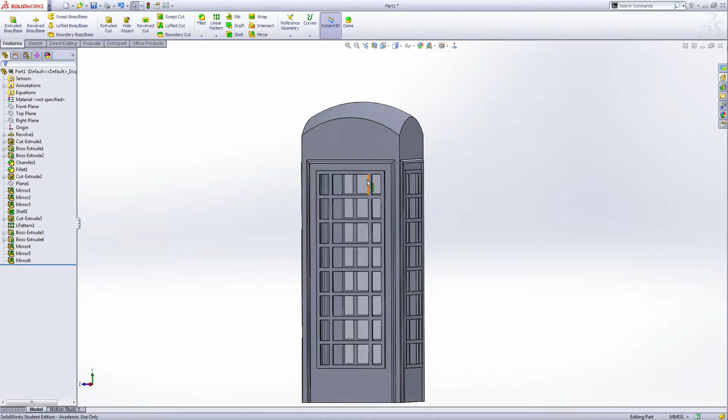Last time we stopped here, before we ended the telephone sign on top of this part, we make a chamfer on this window like this. Let's select the chamfer tool here: the depth is 0.5 millimeter and the angle is 45 degrees.

We select the face of this. Zoom in a little bit, then select the whole face. Select this face, okay, now all the edges are selected. Rotate a little bit, zoom in, and select this face.

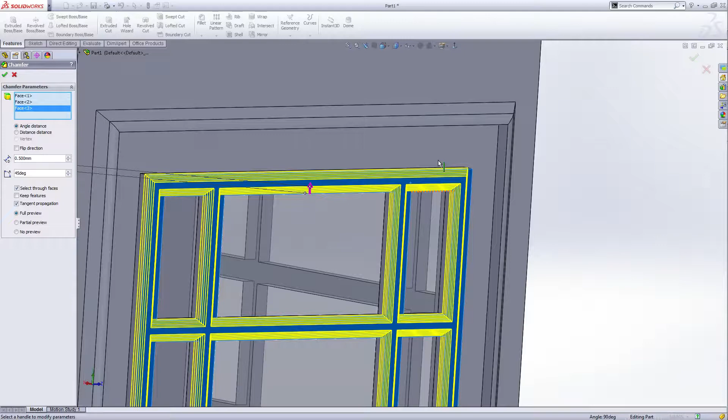Rotate to this way, select the whole face. Now the last one, rotate, select this face. Remember, make sure you select the face, not the edge, something like this. So we need to select the face. Now select all the faces, and all the section is done.

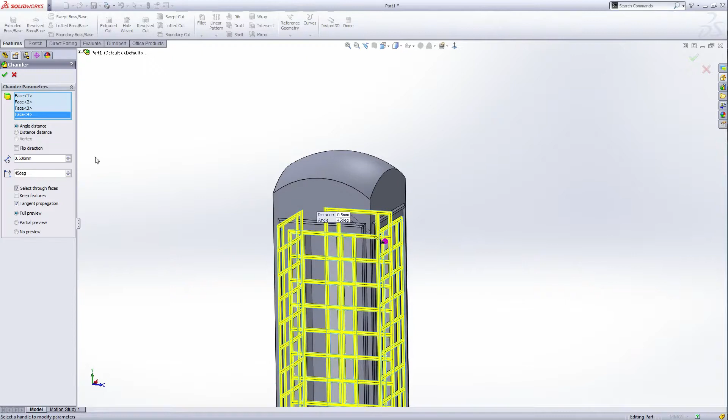Click the green check. Now we made some chamfer on these windows, you can see the difference, it now seems pretty. Okay, now we hold the control.

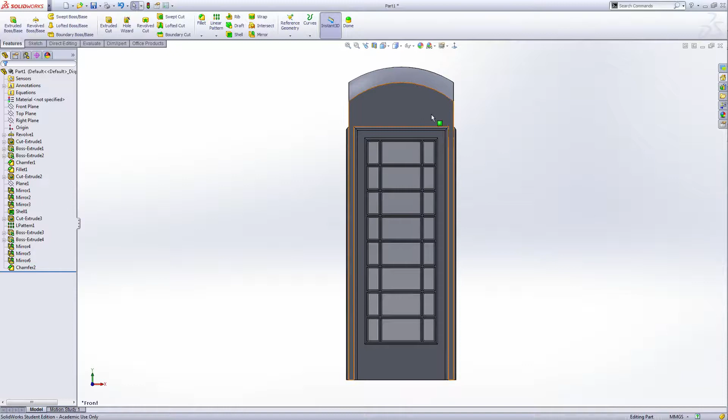This is the face, this is the front view. I want to use this view to do the first one. Select the top face, click the top face, and extrude boss. Now make the sign of the telephone sign frame.

Now select the center rectangle, draw a rectangle. Select dimension, hold the control, the center and the original point, make them vertical. Now give some smart dimension of this.

The height of this is 6 millimeter. Distance from the original point to the center is 4 millimeter, and the total length of this is 36.5 millimeter. Now exit the sketch.

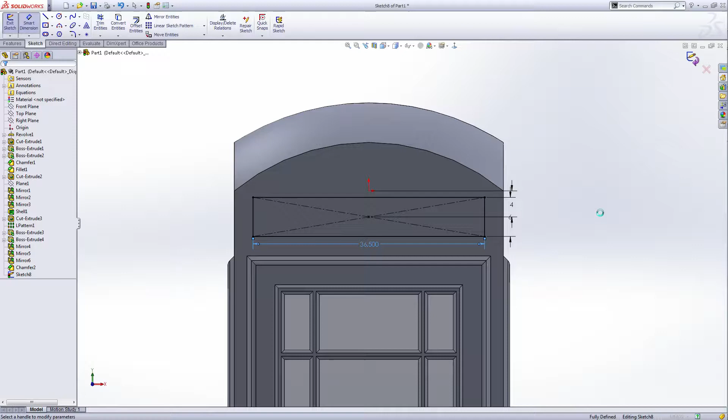Extrude outside, the arrow pointing this way, see, pointing this way. So the depth of this is 1 millimeter, and green check.

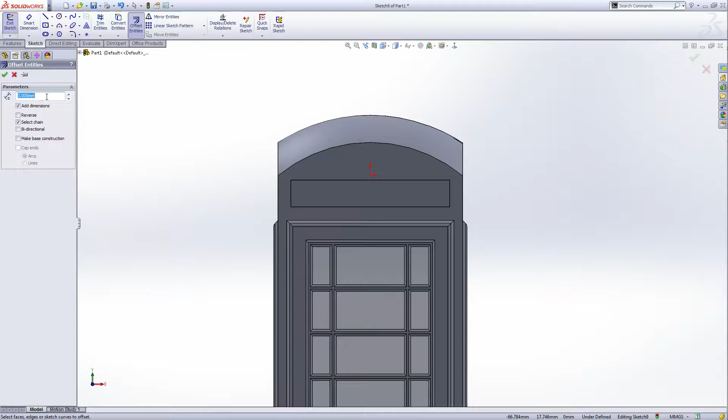Now we cut the hole for the telephone sign. Select the face we made and extrude cut. This time use the offset entity, and the depth of this is 0.5 millimeter.

And we select the outside edge of this. We want to reverse, point inside. Okay, now green check. Exit the sketch. We want to cut inside.

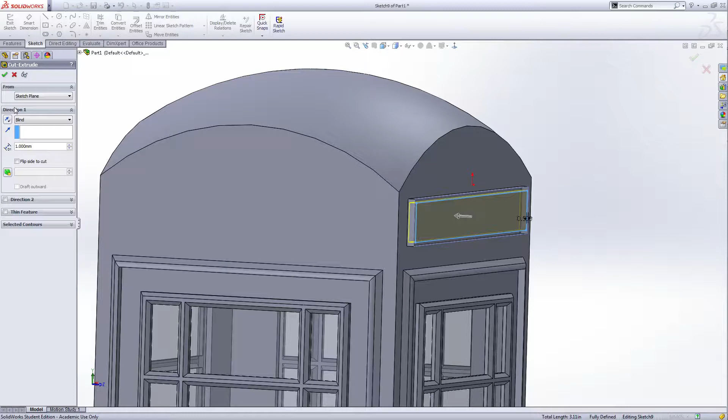Cut inside this, and then we got the frame for the telephone sign. So the cut depth is 1 millimeter and green check, and the cut inside. Okay, like this.

And then next we make a crown for the telephone sign, because it's the English style, they have queen. Now select this face again and extrude boss.

Use the center line, draw the reference center line like this. Draw another center line, horizontal center line. Make sure there's a yellow sign, the horizontal sign there, and then smart dimension.

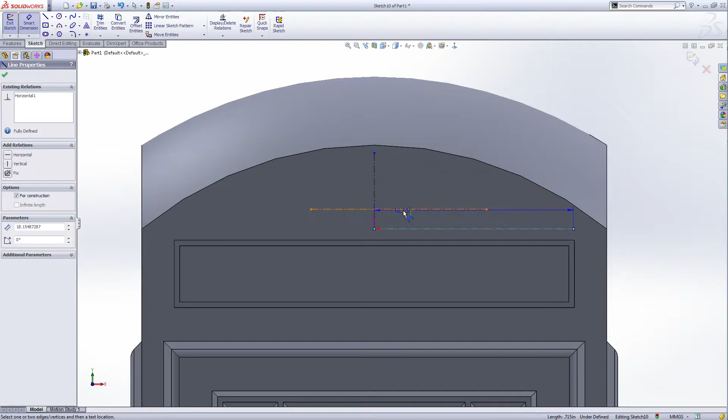This line from the center line is 1.5 millimeter. Now I'm gonna use the line tool, draw something like this. Select, and then use the mirror entity, mirror this, mirror it like this. Okay, you can adjust this a little bit.

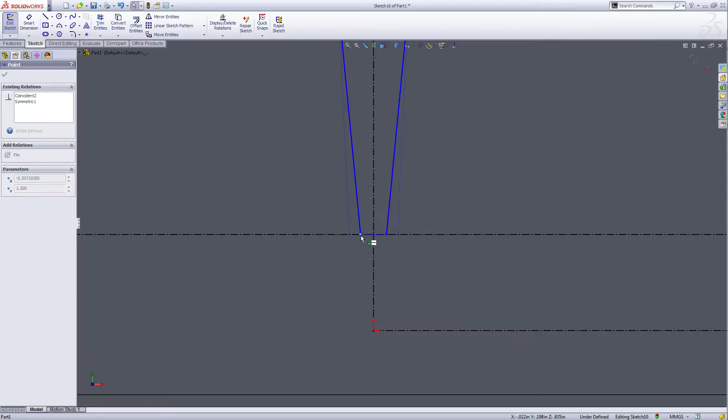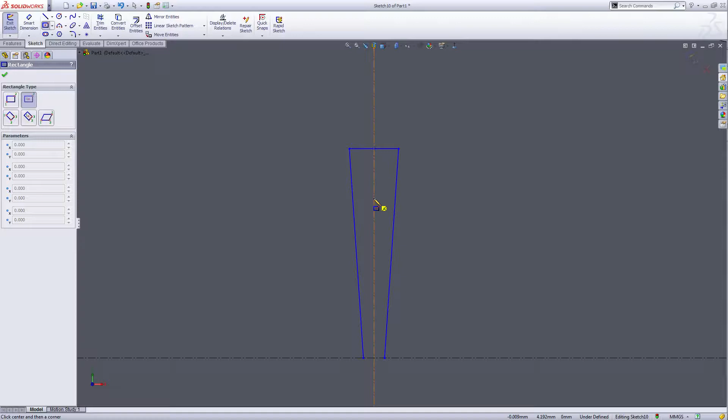Let's see, this part moving inside a little bit. Now I can use the center rectangular and draw a rectangular from the center, on the center line. So draw rectangular like this.

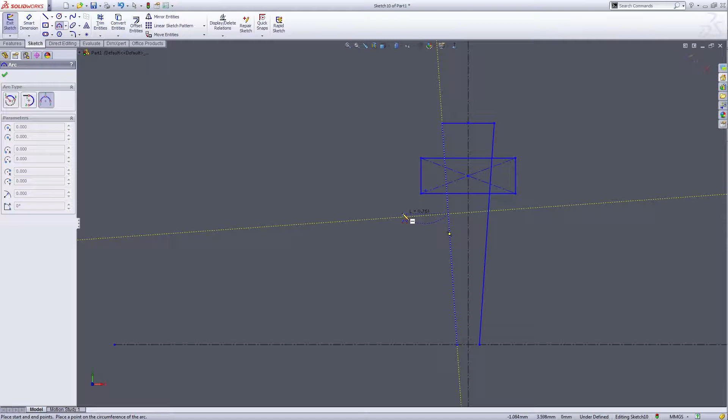Okay, now select. This is the cross line on the ground. Now I use the 3-point arc, draw something like that, and draw another 3-point arc.

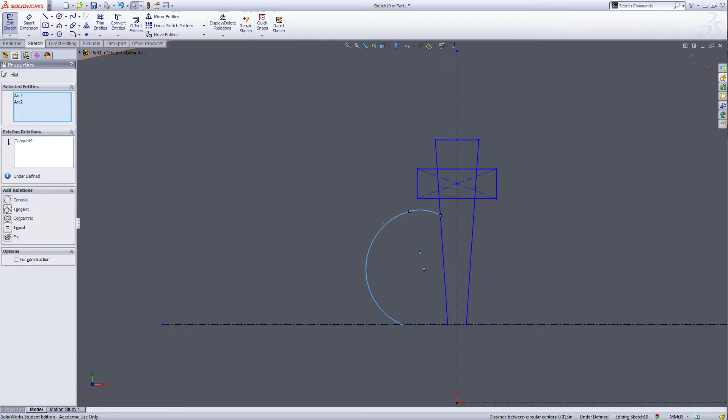Select, and hold the control, select these two arcs, make them tangent, and adjust this a little bit to make it look nice.

Now I'll use the mirror again, mirror these two arcs to the other part. Now this half is done.

We need to draw another one. Select the 3-point arc again, I want to start from this point and draw an arc like this. Draw another one.

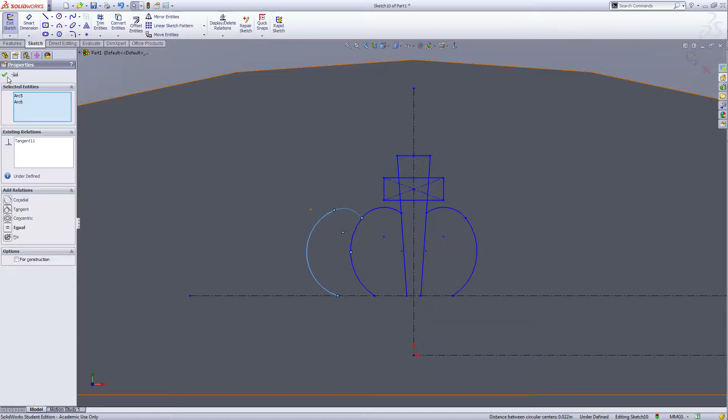Select, hold control, make this tangent. Adjust this a little bit, lower, maybe inside.

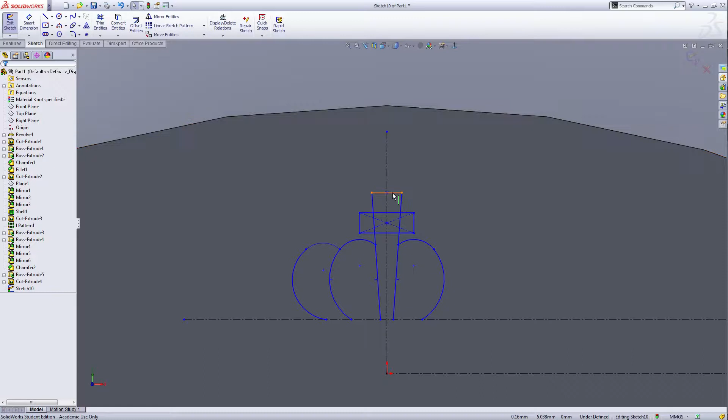I want to make this a little bit longer. Move this part up, and this too, move this a little bit up. Okay, seems nice.

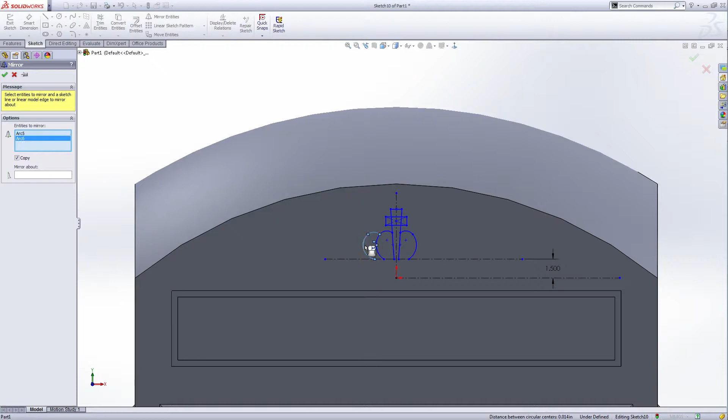Now use the mirror tool again, click here, click here. I want to mirror these two arcs with the center line like this. Alright, almost done.

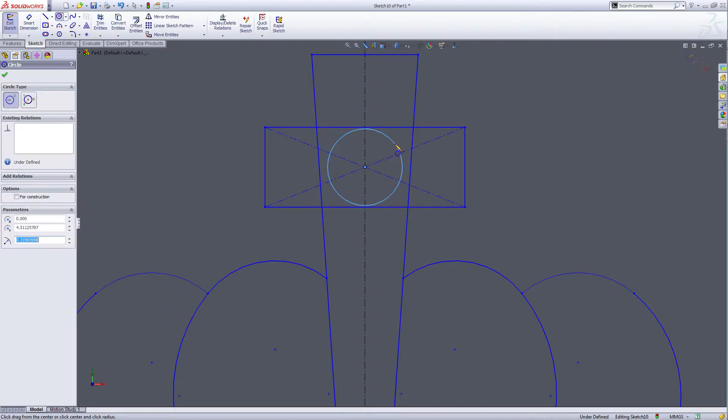Now select the center circle. Draw a circle with the center coincidence with the square we drew, so draw like this. It does not need to touch each other, just like this. Now use the trim tool, trim this off.

Now escape the trim. Use the 3-point arc again. Draw arc, try not to give them the relation. Draw arc like this. Now select the two ends of the arc and select the center line, and make it symmetric. I can adjust this.

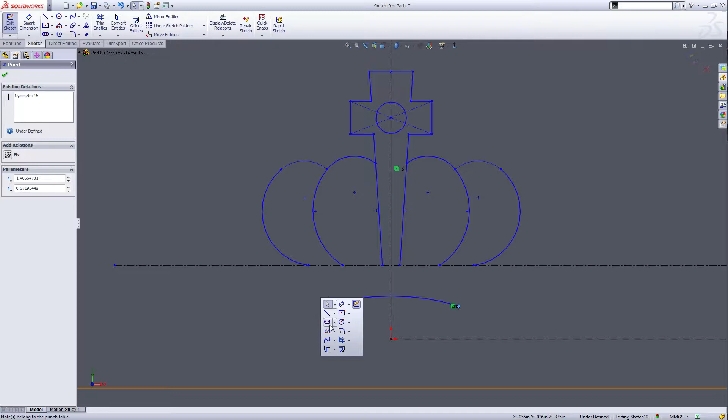Adjust the height of this and the length, and I will use the 3-point arc again to connect these two points. Draw something like this. Now select this one, and then select the line here, and make them tangent.

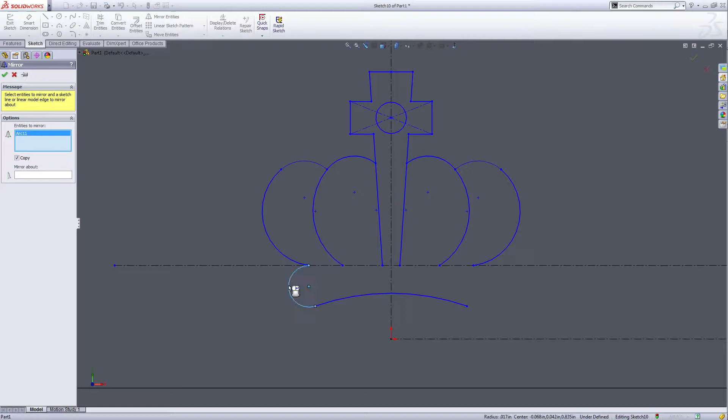And make this a little bit smaller. Make them tangent. Smaller, like this. Now I use the mirror again to mirror this. Click clear and only mirror this part. Select this one. Okay, check. Now this is the top crown we made.

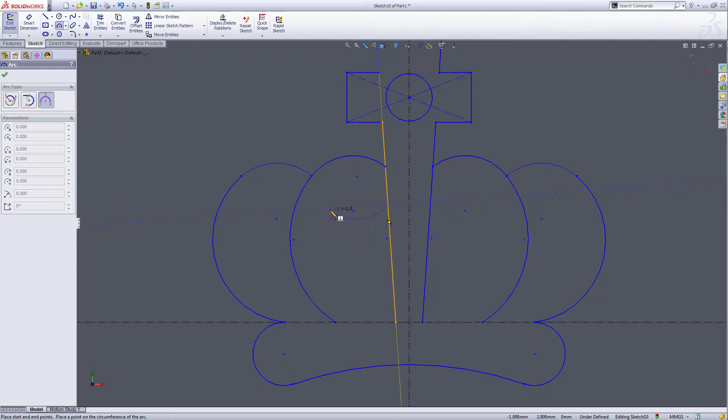We need to make a hole inside this. So select the 3-point arc again, and draw something similar to the one we did before. Now draw another one. Select both of them and make them tangent. Tangent, okay, seems nice.

Seems nice. Now we use the mirror entity to mirror this one also, with this. Okay, now 3-point arc again, do another one here. Okay, another one.

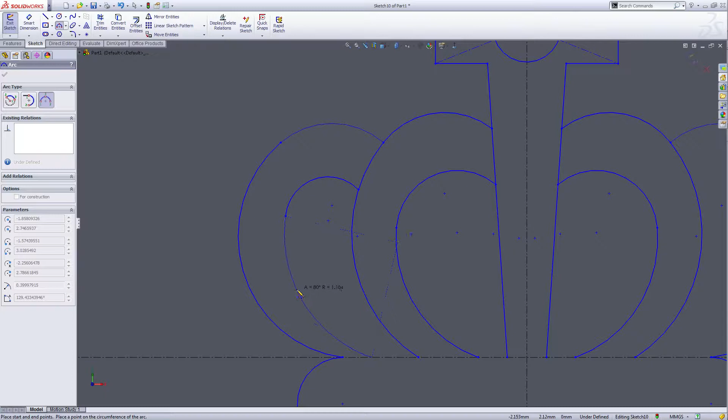Okay, select and make two of them tangent. Adjust this a little bit to be inside. Seems better now. Mirror again, use this. Okay, and check.

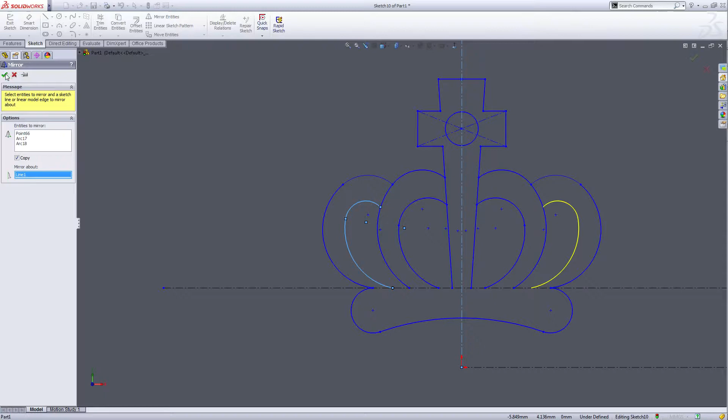I think we can add some circles on the bottom of this. So select the circle. This is the ruby and all this. Three, okay, left. Hold control and select all of them, and make them equal size.

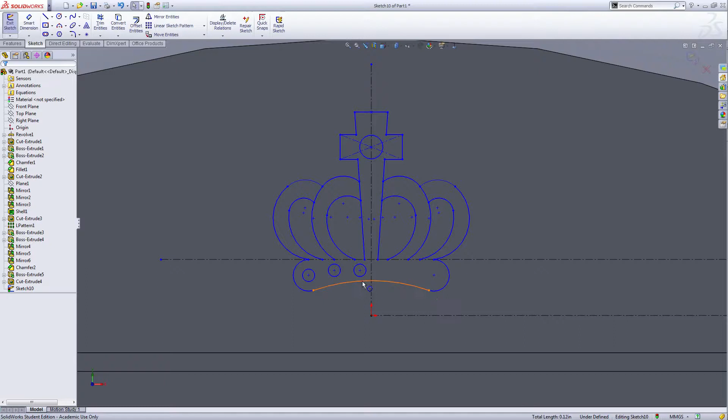And green check, and adjust the position a little bit. So move them a little bit higher. We're gonna use the Mirror Entities here, and mirror the three circles with the center line. Okay, now green check.

We will do the extrude boss later, so we do not close it yet. For example, like this part, we want it to be a hole, so we need to close this part. Now select the line and connect it to these two points. And also this, we want it to be a hole, so close this sketch, and also this sketch, and also this one.

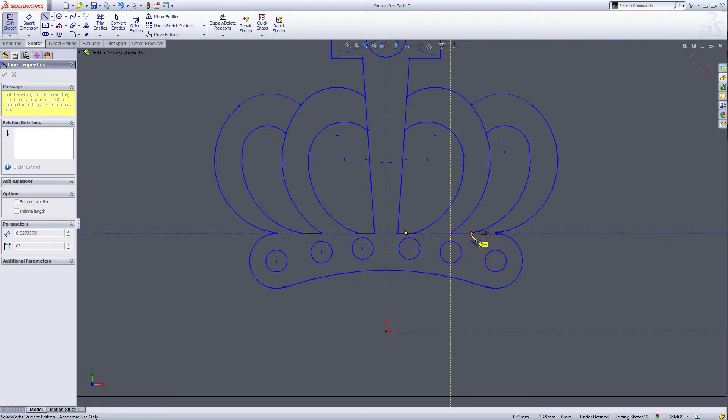Okay, now this is the line. Now the whole crown is one whole piece. We can extrude. I think we can leave it like this; we do not need to fully define this. If you want to fully define it, you can right click and select fully define, and the green check.

And I want to point outside, so you can select here like this. The depth is 1 millimeter, and green check. Okay, now this is the crown we have. This crown is better because you have the small hole here.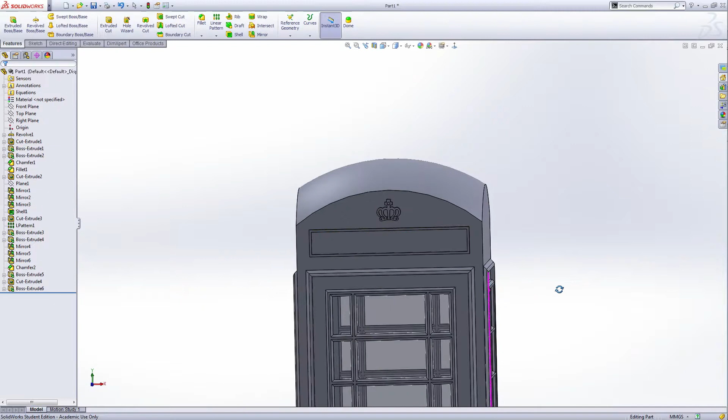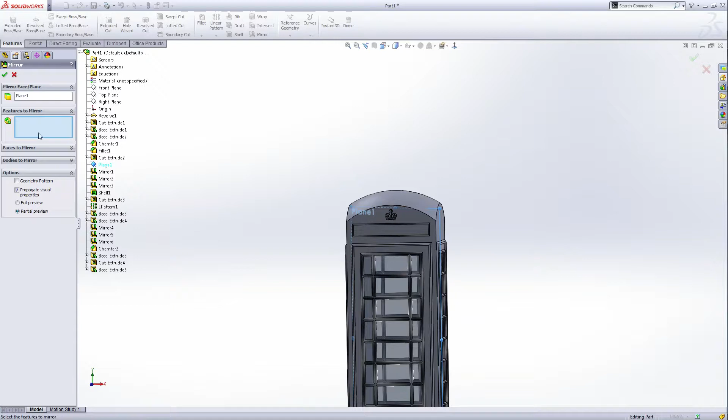Now we're gonna mirror this frame for the telephone sign and the crown, and then next we'll make the telephone sign. Remember the plane we made before, so show this plane and select the mirror. First we use plane one as our mirror reference, and we want to mirror this after the chamfer, so this one and this extrude base. Select this, so green check. Okay, I'll get two of them.

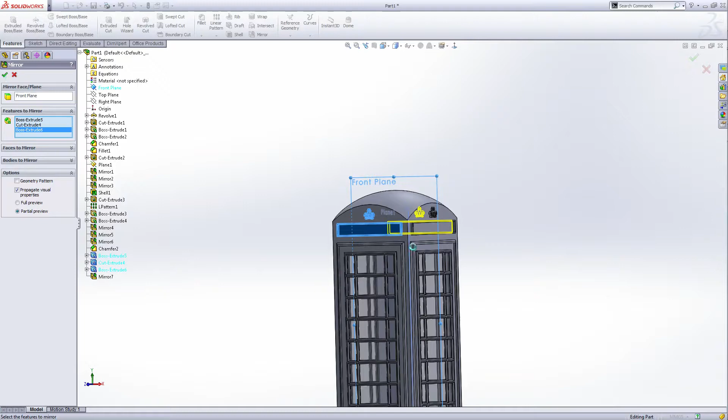We mirror again, use the front plane, and also after chamfer 2 and 3, except the mirror. Okay, now green check. Okay, once more, use the mirror again. This time use the right plane, and we select mirror 7. Okay, green check.

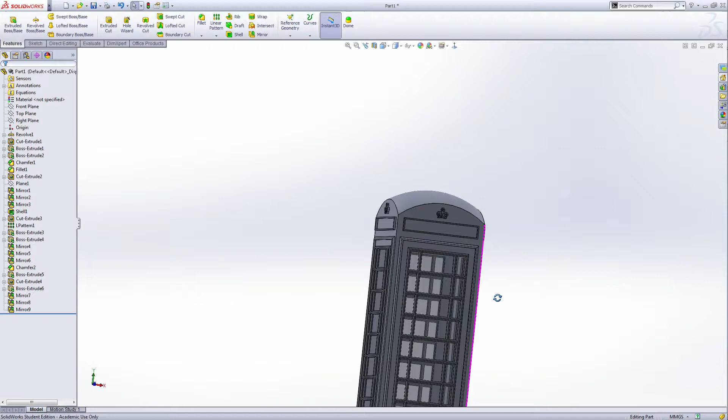Okay, now we have four of them on each wall. Hide the plane, like this. Now I'm gonna make the telephone sign. Control 1 is the front view, so I'm gonna select this face. I'm gonna make the telephone sign from this face first, so it's the boss.

Okay, now let's make some reference frames for all these letters. We're gonna draw a center, corner rectangle from this corner to this corner. Okay, and then select, I can give some dimension of this. The dimension of this is 3.5 millimeters.

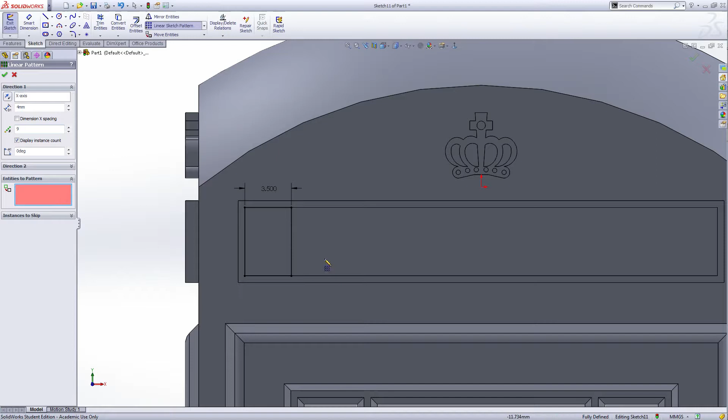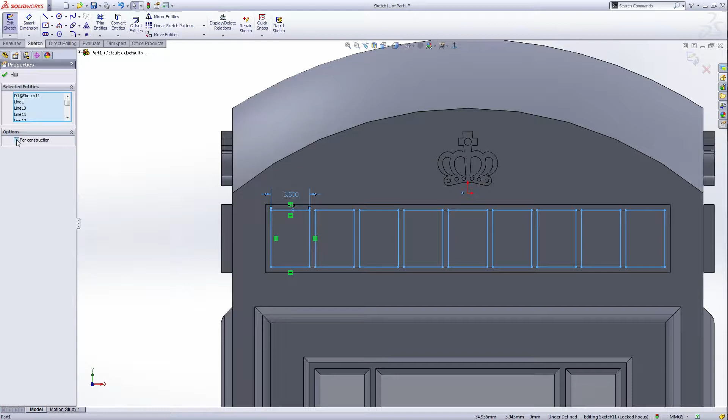Okay, now select, now we use the linear sketch pattern, and this is the x-axis. This is 4 millimeters, and the number is 9. And the feature we want to make is this one. 3, 4, okay, 1, 2, 3, 4, 5, 6, 7, 8, and 9, because we have 9 letters. So green check, and select from the right part, drag all of them, and set for construction, because we won't show them later.

Now we make the letters. So now we select this, let's see this. Okay, all of them now is for construction.

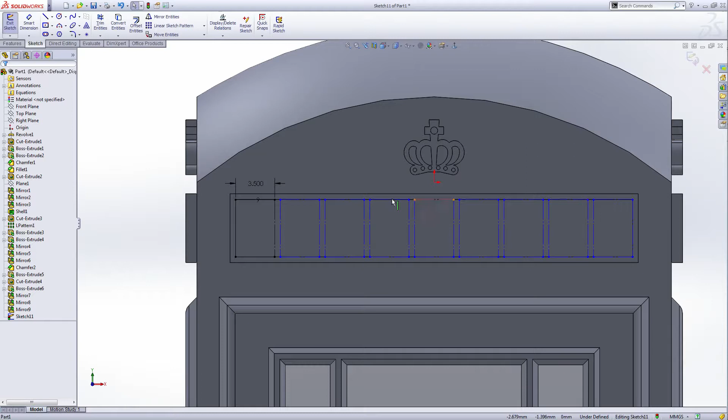Use the corner rectangle, draw from this corner. This is letter T. Draw another one. Okay, we need the middle point. So select the top line like this, and it's gonna show the middle point of the line. So select the middle point, we're gonna put a point here, and draw a center line from the point.

Okay, select, and select the three of them and make them symmetric. This is now letter T. We want to make this line and hold control, and this line have the same equal length, and trim this off. And remember, there's still a small one on the top. Yes.

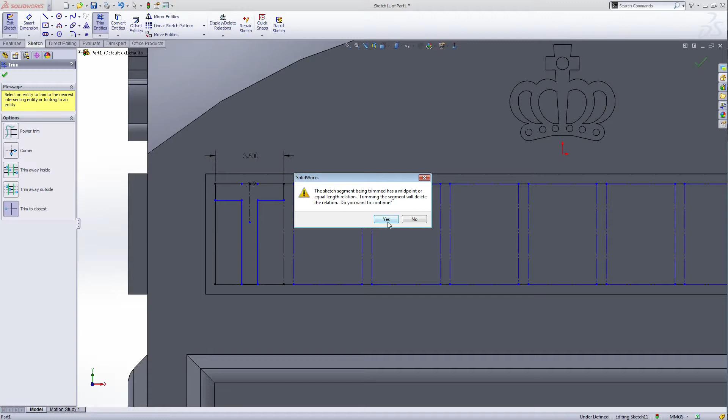Maybe I'm gonna click all of them. Okay, I'm gonna draw another one. Draw another line connecting them. Okay, T done. Now next is the E. Use the corner, draw like this.

Okay, this is E. We make all of them select this one, hold control, select this one, make them equal. Okay, go and check. Now I'm gonna trim them, trim off.

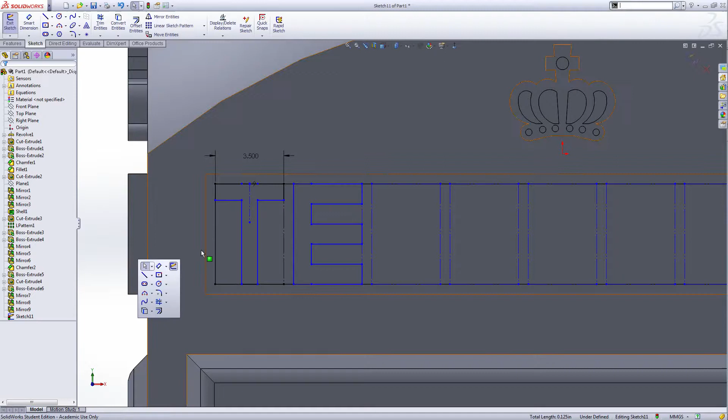So there's no line left here. Oh, I cannot trim here, so I'm gonna use the line again. Okay, now the E is closed, letter E is closed. And then L, the corner.

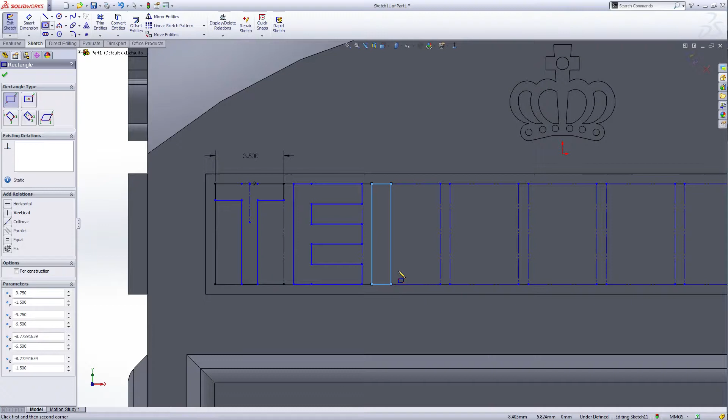To this line, select this one, hold the control, select this one, make them equal, and then trim. We should remember we're gonna trim this off. Okay, this is the letter L. Now this, we're gonna make another E.

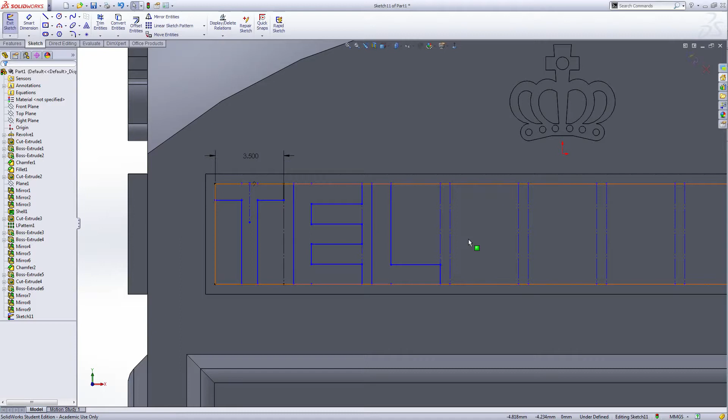We can copy this, so right click and select here, Control C, and we can make the Control V. We got another letter E. We can put it here.

So we can select the move entity here, and this is the E we selected, and the start point we want to start from this point. So you can move just the start point, just left click, and that's all. Then you can move it to this point and click again. Okay, now this is another E.

The letter P. First we use the corner rectangle, draw this, and then we use the center point arc, try not to give them the relation.

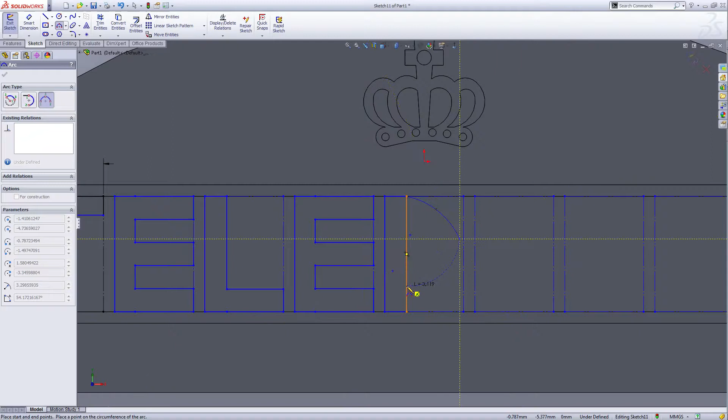And then use the 3-point arc, draw arc like this. Okay, and make them tangent, this one and this one, make them tangent.

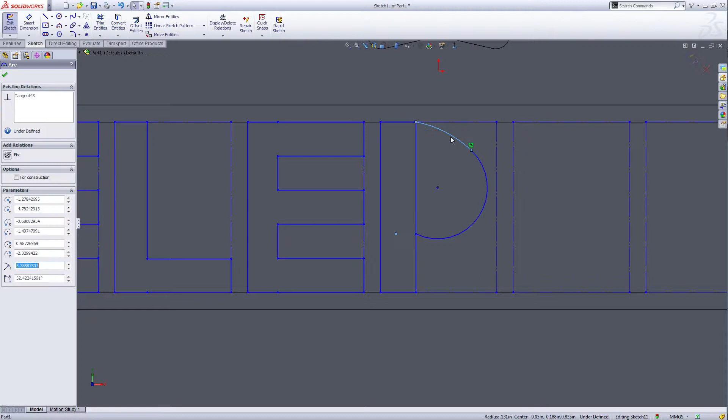Okay, you can drag this bigger. Drag this bigger, drag this up a little bit. And make this one, hold the control, and then this line make it tangent. I'm gonna trim off this. Okay, now adjust the P a little bit, make it seem better.

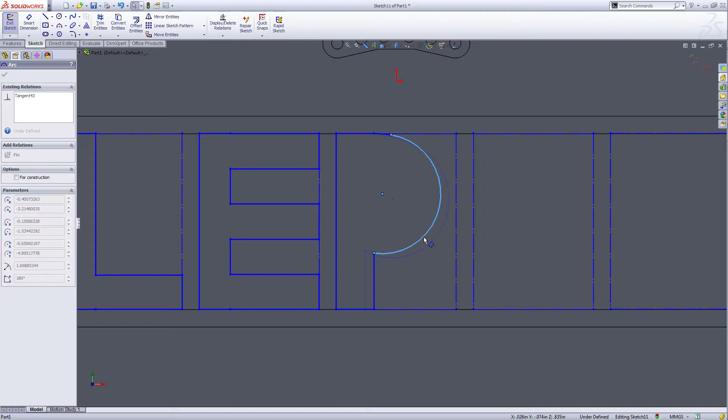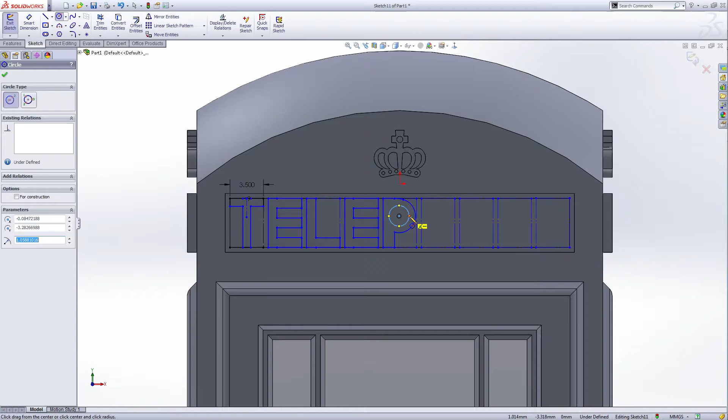Make it seem better. Okay, now draw a circle inside. Okay. Now this is the letter P, and next is the H.

We draw H before, so H still we use the corner rectangle. Draw H like this. Another one. Remember the frame, so the frame makes the letter seem the same size.

So okay, I'm gonna use the center line. Draw a center line from the midpoint of these two edges. Okay, now use the line to draw a line. Try not to give them the relation, just the horizontal.

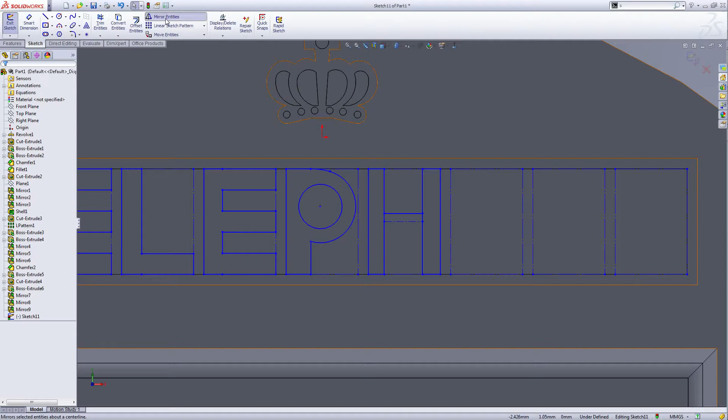No, I'm gonna use the mirror. Mirror this line with the center line. Okay, then you can adjust it. Use the trim to trim this off. Yes. Trim this off. Okay, now adjust this a little bit higher.

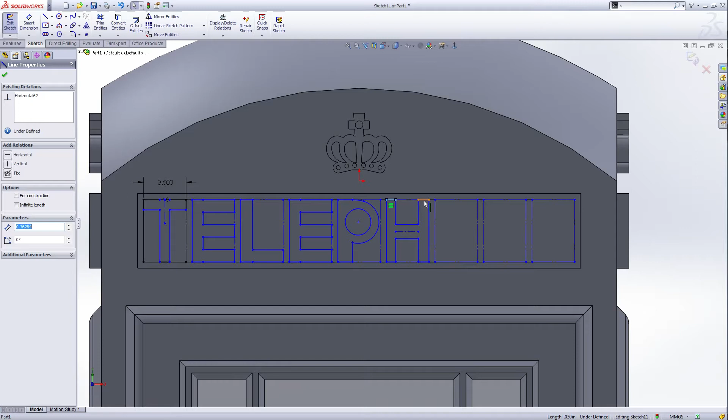Okay, maybe like this. Select this one, hold the control, so this one, make them equal.

Okay, now O. So we're gonna use the center line, draw a center line like this. Okay, now escape, we select this ellipse. Draw, see the center here.

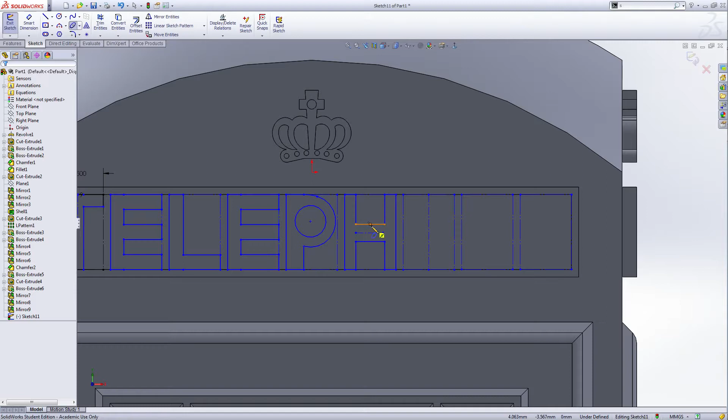Draw from here, try not to touch it, just really close but not touch it. Okay, now draw like this. Okay, now another one, no touch. Okay, this is O.

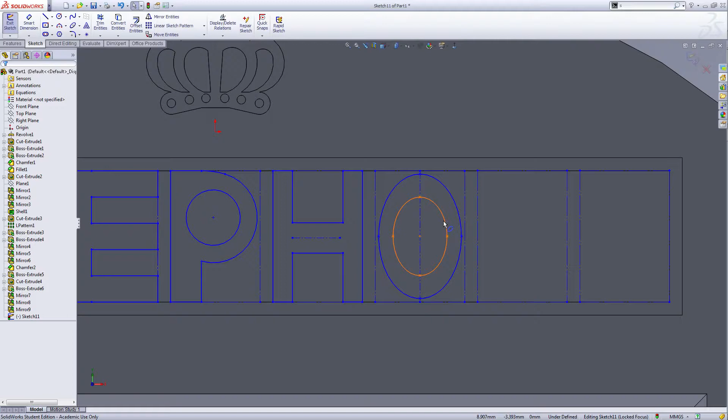Okay, letter N, corner rectangle. Draw like this. Okay, now use the line to draw from this corner.

And this, and the line again, this time from this corner, somewhere here. Okay, and make them parallel. Select this one and this one, make them parallel. Okay, and adjust this bit, just this.

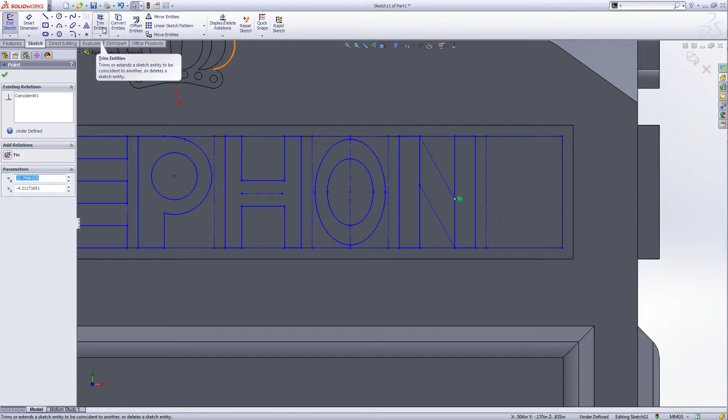Okay, now trim this off. Trim this off, trim this off. Okay, select this edge and hold the control, select this edge, make them equal.

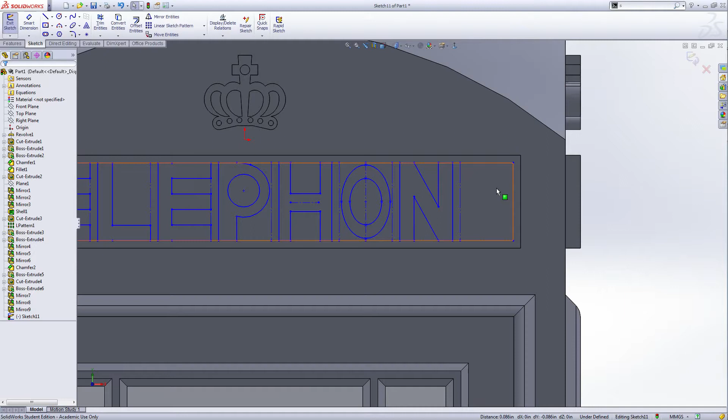Okay, and this point is vertical, and this point and the relation vertical. And the last one is the letter E. We can use the same one, still copy, so Control-V, we put one here. See the move entity, and here the start base point. We select this point, and now you can move it and put on this point.

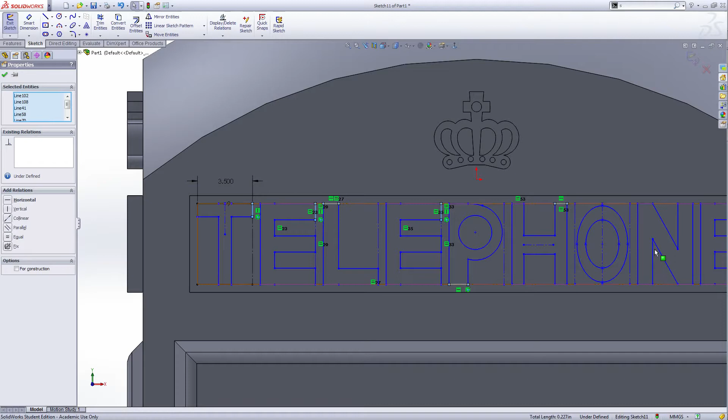Now get all these letters, we just want to make them equal. Remember, for each letter we make the edges all the same, so now we select each edge of them. Select this one, hold Control, select this one, and the P, and this one. The O we don't need to worry about, we're gonna adjust it by hand. Make them equal, green check, and now you can adjust them.

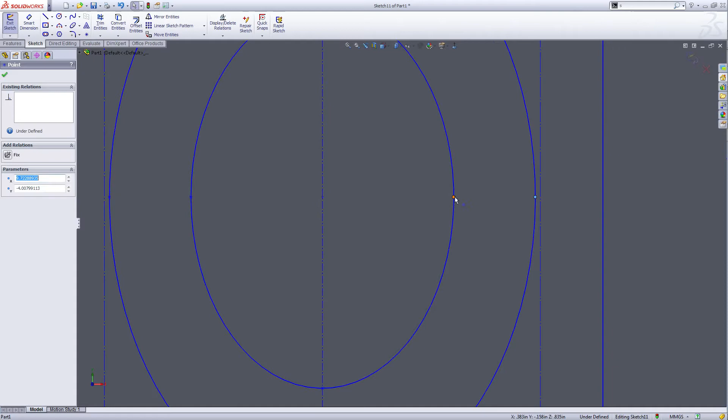See if the size is okay. If the size is okay, just leave it. Seems okay, we're gonna make this a little bit bigger, so try making it bigger. Make this smaller, so make the letter O bigger. You want to make sure the size is right, this part inside a little bit. Oh, this one is a little bit small. Okay, seems now all the letters are done.

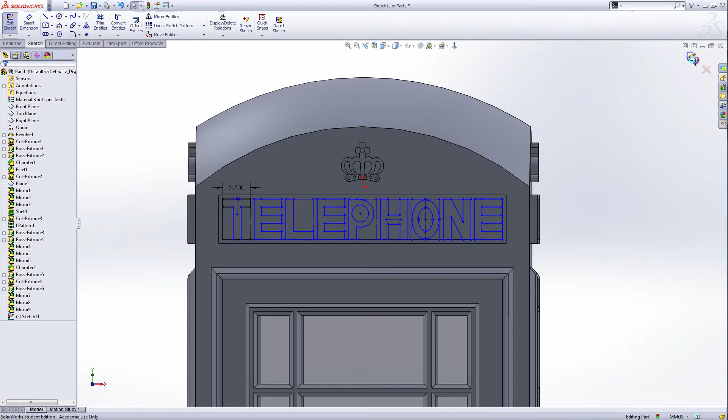Now I just leave it like this. So extrude the sketch. The depth of this I want is 0.5. Green check. Okay, now one of the signs is done.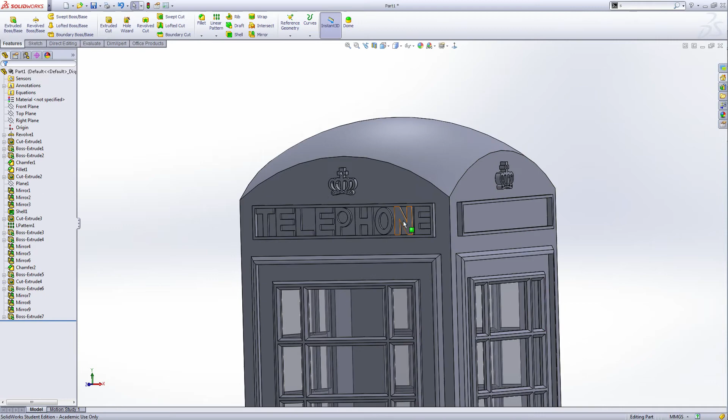We're gonna copy this because we cannot mirror the letters. If we mirror, the sequence of the letters would be disturbed, it's weird, not the right word. So we need to copy this. See this? I want to show this sketch, then select this face and extrude the base.

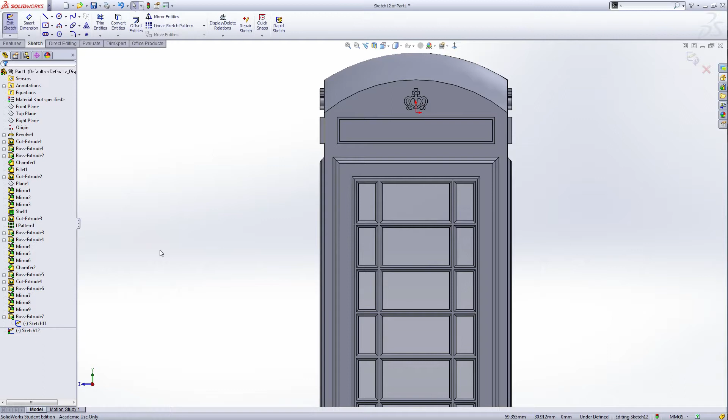Now I'm gonna click this sketch and Control C to copy, click anywhere, Control V, put it here. Same move entities, the start point, I want the original point here. Wait a little while, now you can move this. Zoom in, and I want to click this point. See, I moved this one here. Just green to exit the sketch. The depth is 0.5 outside, green check.

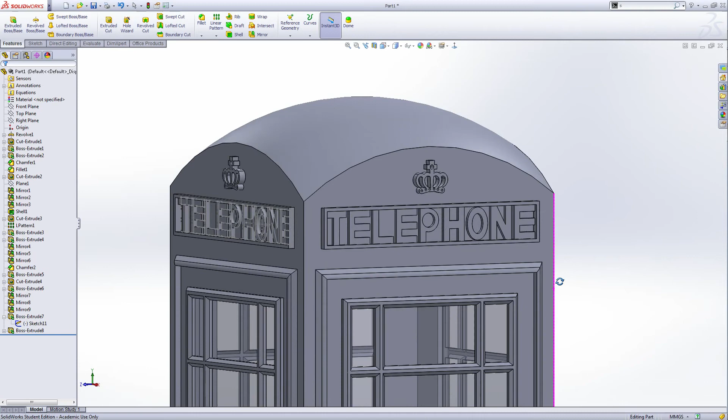Similar to the others, this one, extrude base. Oh, this one I don't want to show, just hide it.

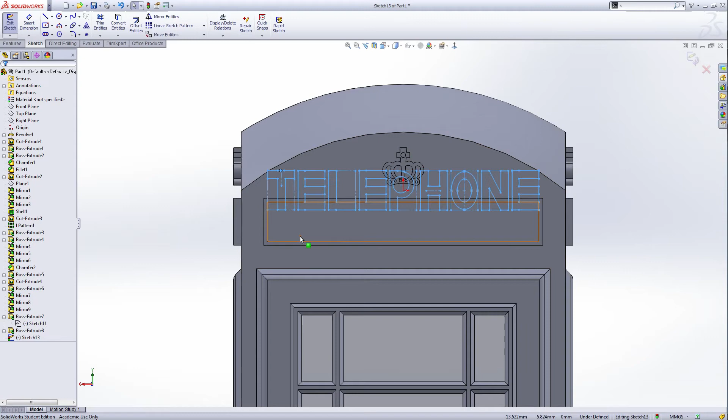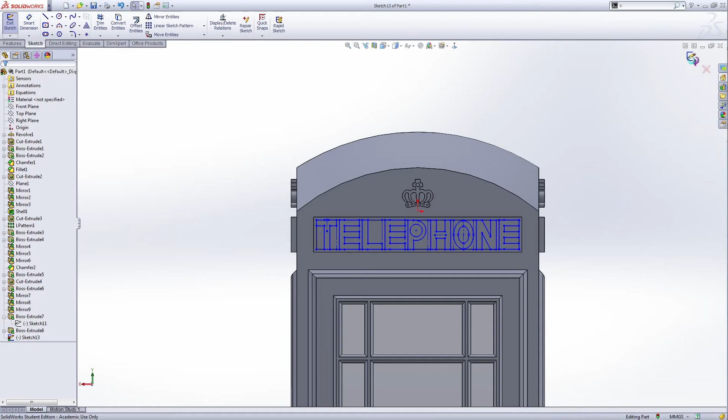Control V, this one is here, and move entities, point from this point. Wait for a little while, need some time to calculate. Now you can move it, zoom in, and just put it on this corner. Exit the sketch, and a 0.5 depth. Okay, now the last one.

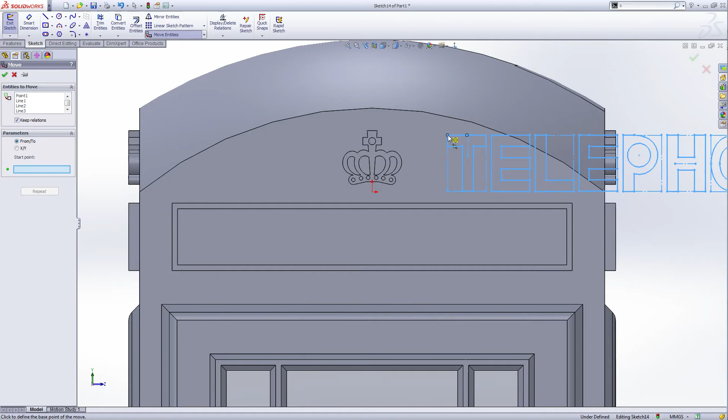This one, and extrude base. Anywhere, Ctrl V, move entities, start from this point, wait a little while. Now you can move it, zoom in, go to this point. Now exit the sketch, and the depth of this is 0.5. Green check.

Okay, now we have all of them. I want to add the base on the bottom, so rotate like this. Select the bottom face and extrude base.

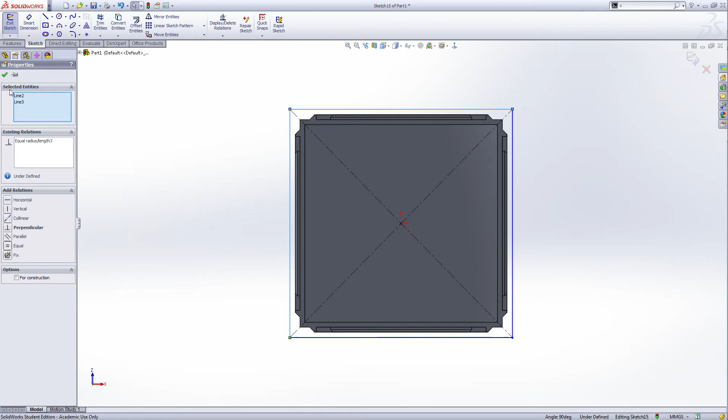Now you're gonna draw a center rectangle. Doesn't matter, just make it bigger. Select these two edges, control-select them, make them equal, and green check. Now select one of these edges, zoom in a little bit, hold Control, select the outside edge, make them collinear. Now we fully define the sketch.

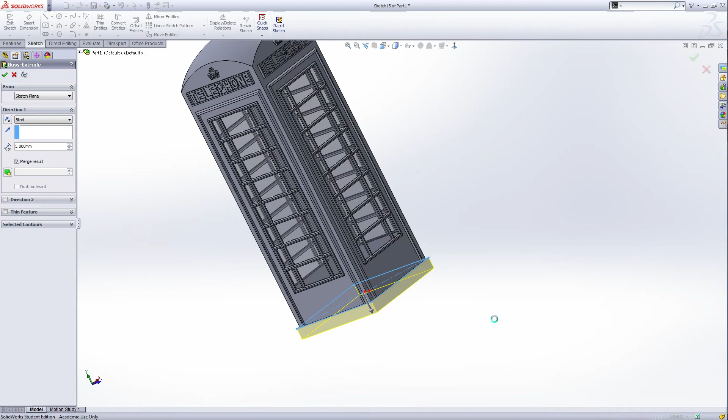So exit. We want to make the extrude downward, so the depth is 5 mm. Exit the sketch. Okay, this is the base of the telephone booth.

Now I'm gonna change the color of everything. First select the part name and the appearance. I want to change the color of the whole thing to red. Which red is better? Maybe this one is better. Okay, green check, this is the color of this.

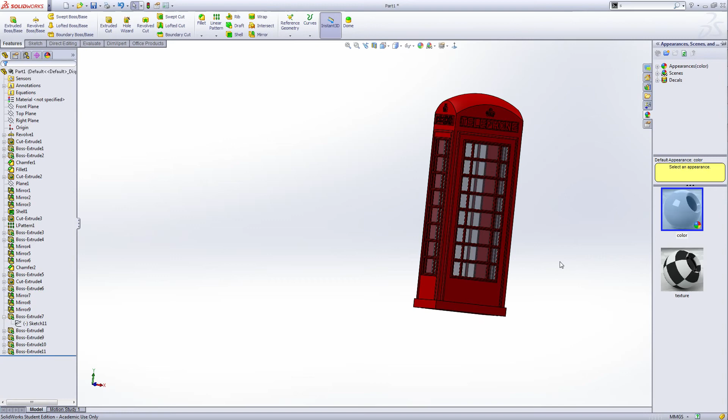We're gonna change the color of this. So now see here, appearance, click here and paint on the screen, on the screen. And for this appearance, I want to change the size because the color I don't like, it's not shiny, so I want to use the brass. Let's see which one. Chrome, chamfer, okay, maybe not this one.

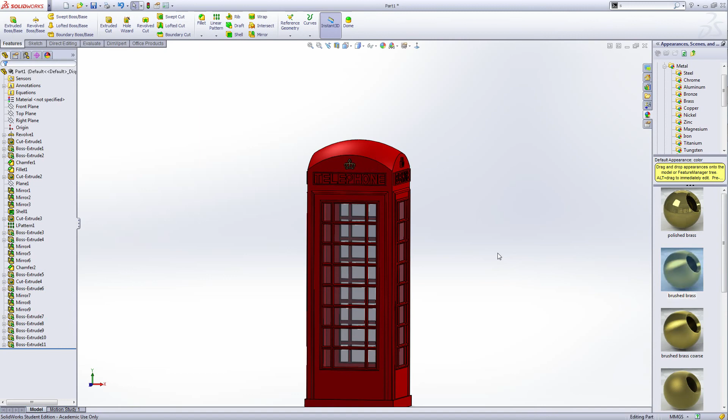Okay, so this one, I want to change the color, change this to this color. Appearance, sign of the telephone, Boss-Extrude, sign of the telephone, still this color. Appearance to this color. This one, hold shift till this one, and all this. Now for the telephone, the letters we change to this one. I'll change the color of this.

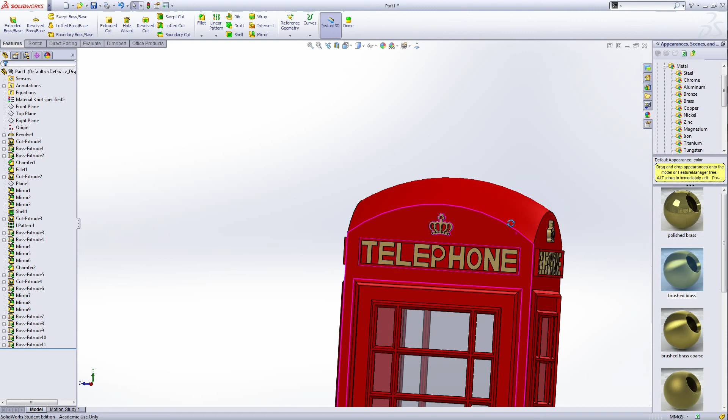Mirror, let's see what's gonna happen. No, everything's gonna change. Okay, now we just need to select the mirror, and that's it. Click back, and pin off this.

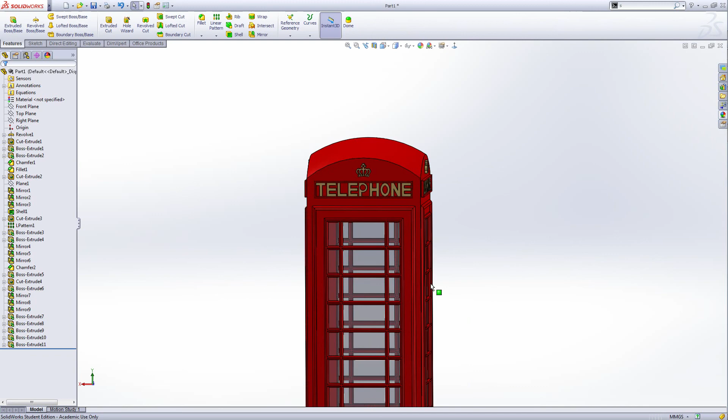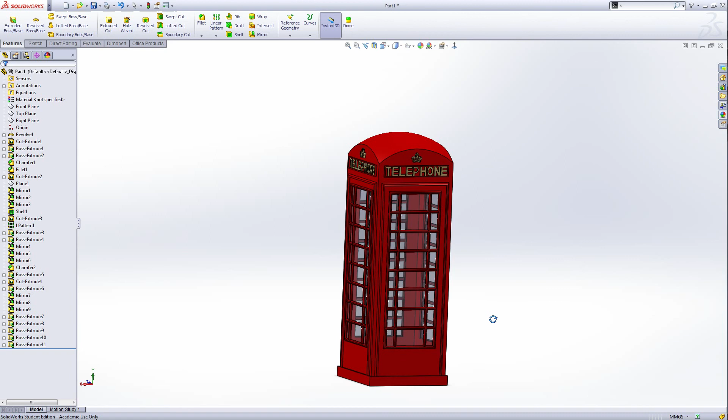Okay, this is the telephone booth we made. But it's not finished yet because I'm gonna make a door on this telephone booth, so you can open and close it, and I will put a telephone inside. So this is just the basic model of the telephone booth. I'm gonna add more other details inside next time. So thanks for watching and hope you like it, see you next time, bye bye.